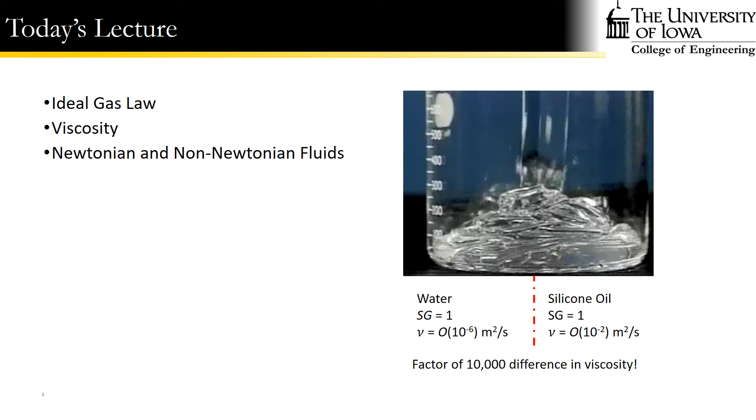Another way to refer to viscosity is as a notion of fluid stickiness. As a sub-bullet under viscosity, we'll discuss the 2 main classes of fluids: Newtonian and non-Newtonian. Let's go ahead and move to the notebook.

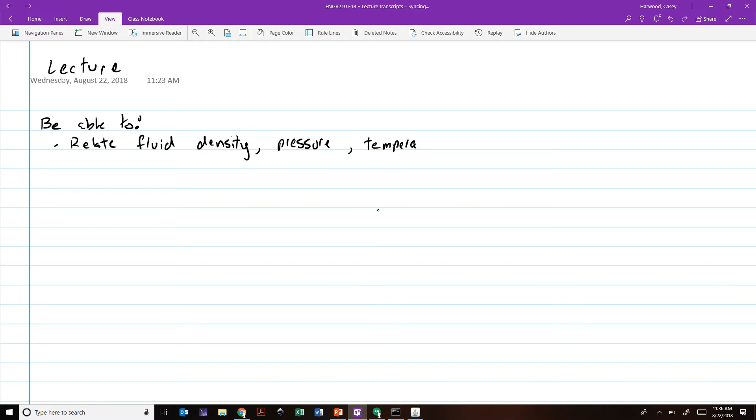So the questions we want to answer, or the goal by the end of the lecture: we want to be able to relate fluid density, which we discussed last time, pressure, and temperature using the ideal gas law.

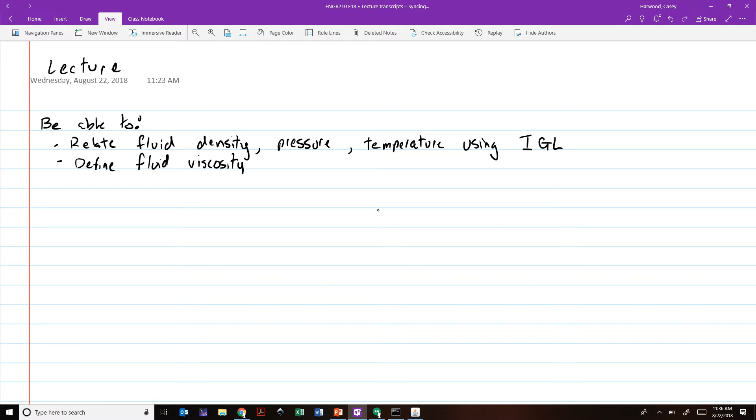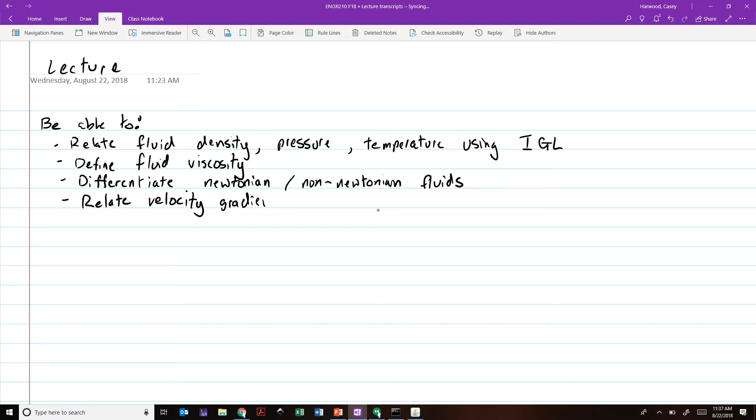We want to define fluid viscosity, differentiate Newtonian and non-Newtonian fluids. And then finally, where the numbers actually come in, we want to be able to relate velocity gradients in a fluid to shear stress. It's the definition of fluid viscosity and this idea of a Newtonian fluid that will allow us to do that.

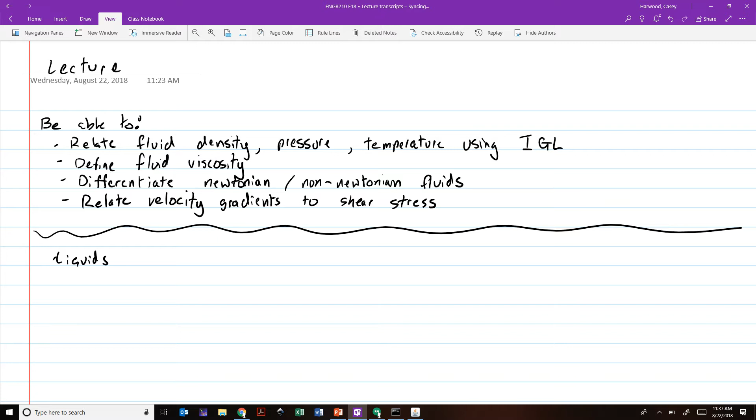Recall that fluids encompass two classes: gases and liquids. And they differ based on what property? Why are liquids and gases different? Compressibility, right? Gases you can squish, liquids you can't. So liquids are what we call incompressible, and gases are highly compressible.

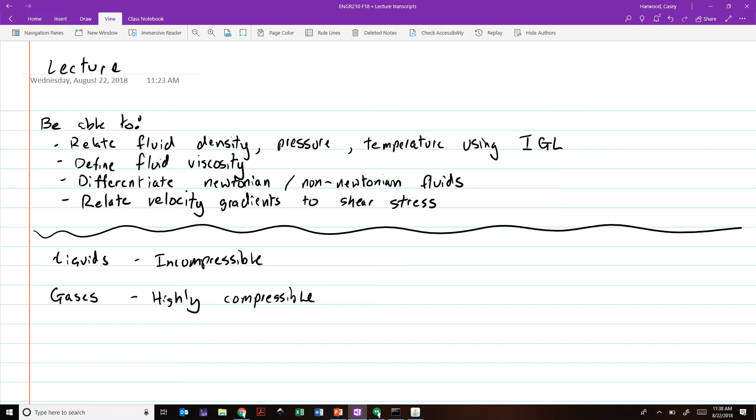This creates a problem for us as scientists, because if we're working with liquids, it's incompressible, the volume doesn't change. It's easy — if we know the volume at one time, we know it at another time, it's going to be the same. But with gases, because they're highly compressible, they're sort of a springy medium, we need some theory to describe how that volume changes, or how they compress under the influence of pressures and temperatures. And that's where the ideal gas law comes in.

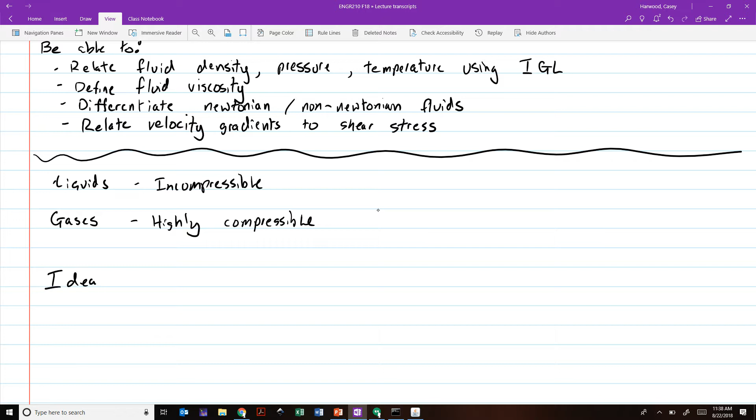This should be familiar to you from thermo and/or chemistry. The ideal gas law is written in several ways. In this course, we'll use this expression: the density is equal to the pressure over the gas constant times the temperature. Or, the pressure is equal to the density times the gas constant times temperature.

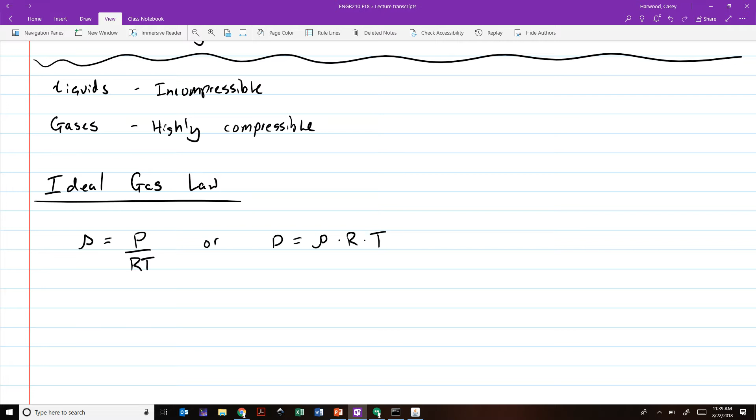In these expressions, rho is defined as density and has dimensions of mass, length to the -3 — think about typical units, kilograms per meter cubed. T is the temperature, which needs to be an absolute temperature, meaning Kelvin or Rankine. This has dimensions of theta, which stands for temperature.

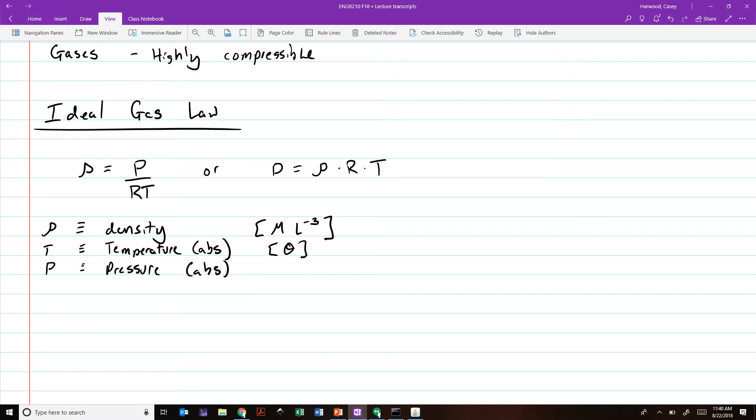P is pressure. Again, this needs to be absolute, meaning measured with respect to zero, a complete vacuum, as opposed to measured with respect to the air around us. Use a tire pressure gauge to measure the air pressure in your tires — it reads 40 psi. The absolute pressure in that case is going to be 40 psi plus the 14.7 psi that is atmospheric, because it's a balance between the two pressures — it's giving you the difference. So for the ideal gas law, we need to make sure that we are adding in whatever the ambient pressure is if we're using a pressure gauge. We'll talk more about this in the next chapter.

And R is, of course, the gas constant. This pressure has dimensions of mass, length to the -1, time to the -2. And if we went ahead and did the dimensional analysis we did in the last lecture, we'd find that R has dimensions of length squared, time to the -2, temperature to the -1.

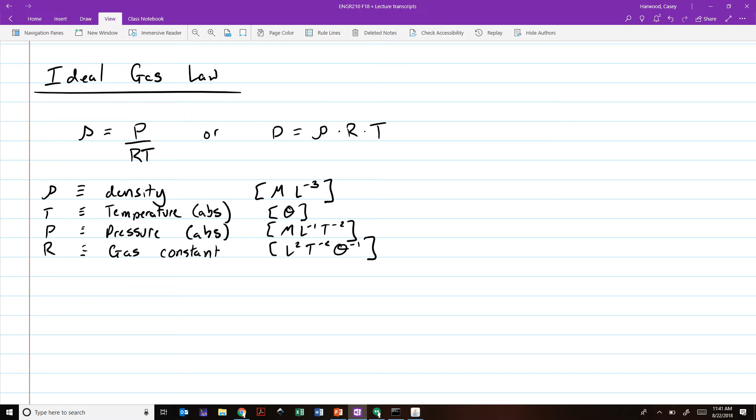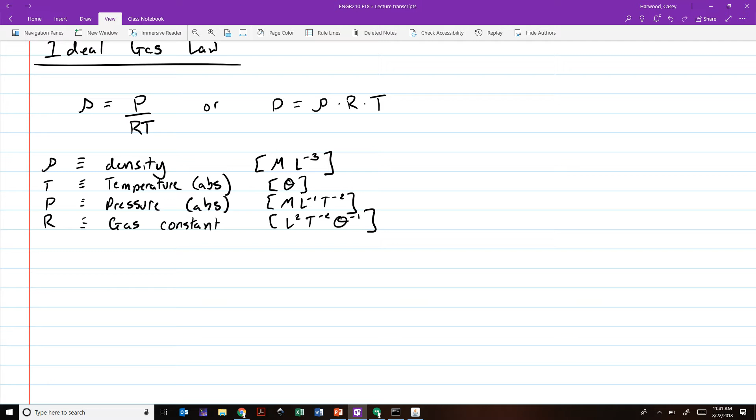So the ideal gas law is all over engineering. We use it a lot in aerospace and chemical engineering, thermodynamic processes, etc. You probably have a fairly intuitive understanding of how it works. For example, if we hold the temperature constant, that says the pressure and the density are going to be proportional to one another. So for constant temperature, rho, which equals mass over volume, is going to be proportional to the pressure.

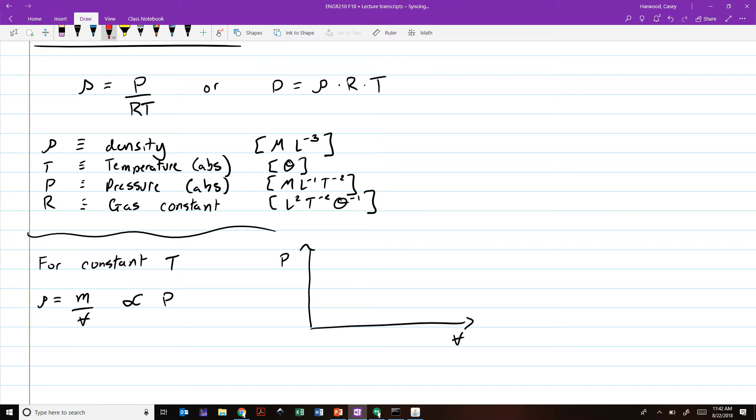This is something we know as Boyle's law. In other words, it's saying that if we were to plot the volume of a gas against the pressure of a gas, they would have an inverse relationship, if it was at constant temperature. And as I said, this is known as Boyle's law.

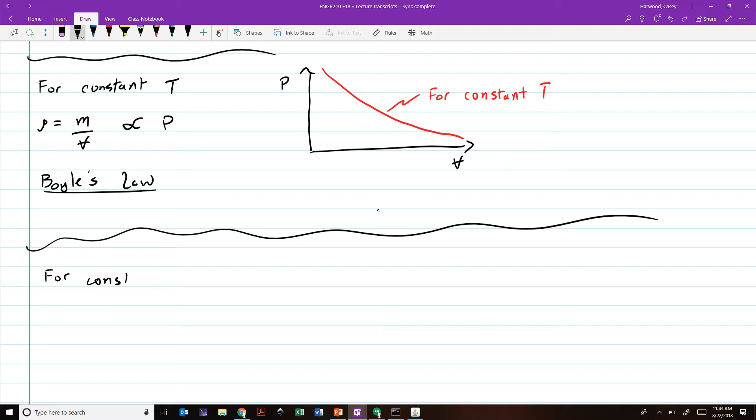On the other hand, if we hold the pressure constant and plot the temperature against the volume of a group of gas molecules, we would find that they vary linearly to one another. So this says that T is equal to P over rho R, which equals P V over R M, where M is mass, V is volume, R is constant, and because of conservation of mass, the mass is constant. So this says that the temperature and the volume have to be proportional to one another. And this one we call Charles' law.

So these are just two variations on the ideal gas law that you've probably encountered before. It's been a long time since I've taken chemistry, so I don't remember what's in the curriculum, but these are based on the more generalized ideal gas law. So let's do a quick example.

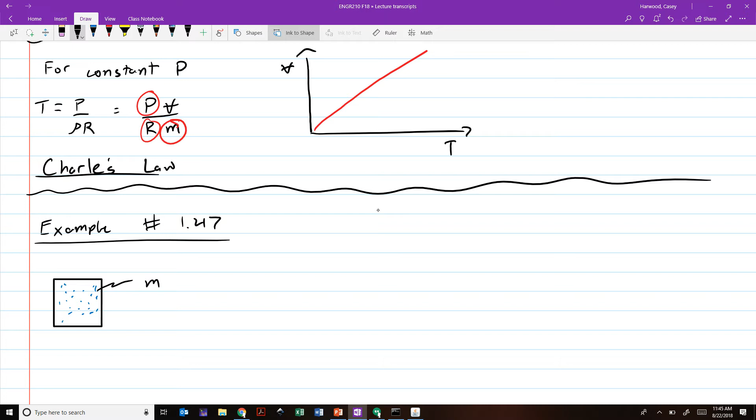So this is problem 1.47 from the book. The idea is we've got a closed tank, okay, and this tank is full of an unknown gas. However, we know that the mass of the contents of the tank is equal to 0.3 pounds mass. We know that the volume of the tank is 2 cubic feet, and we've got a pressure gauge on the side here that's reading 12 psi.

So the question now: somebody says, all right, here's this information about this tank and the gas inside of it. Is the gas oxygen or is it helium? Find: oxygen or helium.

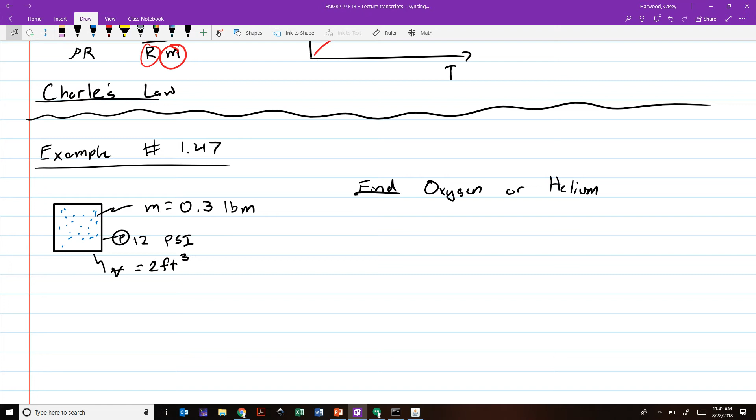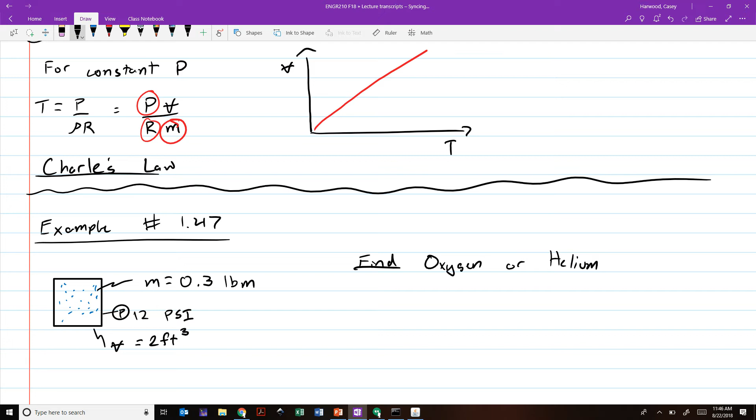So we've got all the information we really need here, right? We know the pressure, we know the mass, and we know the volume. And we have a temperature probe - that's what I'm missing here. We've also got a temperature probe that says the temperature is 80 degrees Fahrenheit. So we've got T equal to P times volume over R times mass. We know the temperature, we know the volume, we know the mass, we know the pressure. So because we know all those things, it's easy to find R.

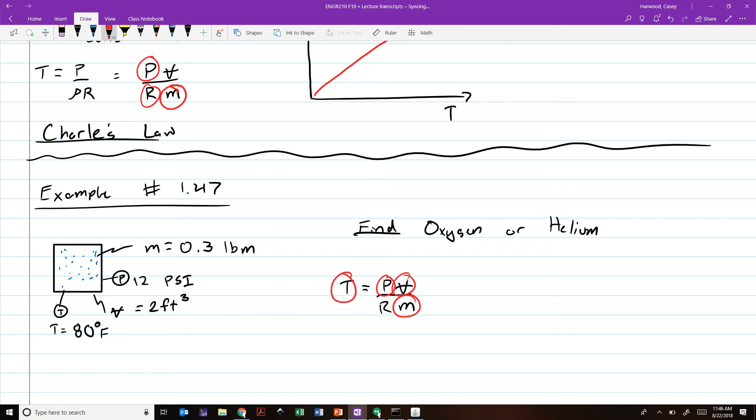And R is different for helium than it is for oxygen, so that should be our clue. The real trip-up here is that we need to remember that we're using absolute units, right? Degrees Fahrenheit, not absolute. The reading from this pressure gauge at 12 psi is not with respect to 0, it's with respect to atmosphere. So we need to go through and translate all of our measurements into absolute units, plug them in, find R. So go ahead and see if you guys can get a head start on the absolute temperature and absolute pressure. Solving for R is going to be then...

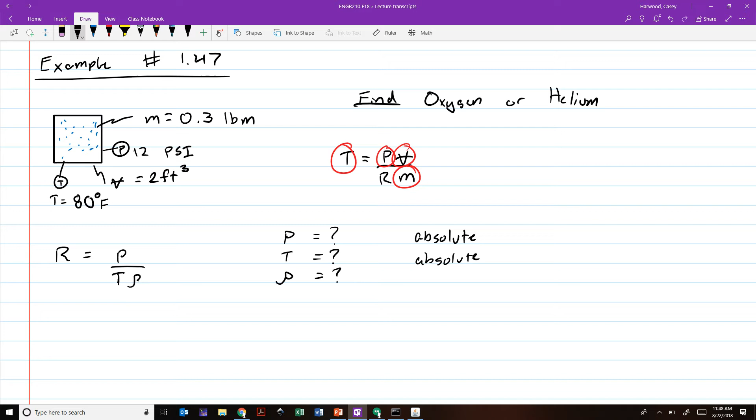What do we got for an absolute pressure? Anyone want to volunteer? Well, what's atmospheric pressure? What's 1 atmosphere? 14.7, okay. So if that pressure is saying the pressure in the tank is 12 psi greater than that, then just add the two. So we're talking about 26.7 psi.

Which we'll see in a second, right, that everything else we have is in feet. We have feet for the volume, we've got our temperature in Rankine, and so it works out better if we put this into pounds per square foot, which means multiplying it by 144. So if we just multiply that by 144, we end up with 3844.8 pounds force per square foot. So it's a -2, okay.

Temperature - I know for me it's been a while since I've done absolute units or absolute temperature units from Fahrenheit. Who remembers the translation from Rankine to Fahrenheit? Kelvin's 273, Rankine is 460. So in this case, if 0 Fahrenheit is 460 degrees Rankine, degrees Fahrenheit plus 460 degrees gives us 540 degrees Rankine.

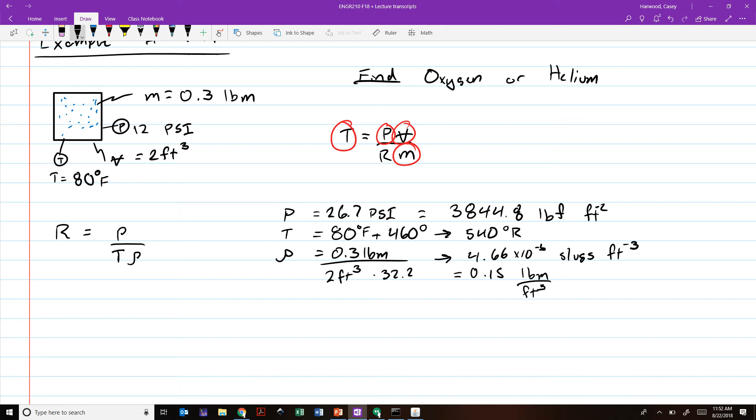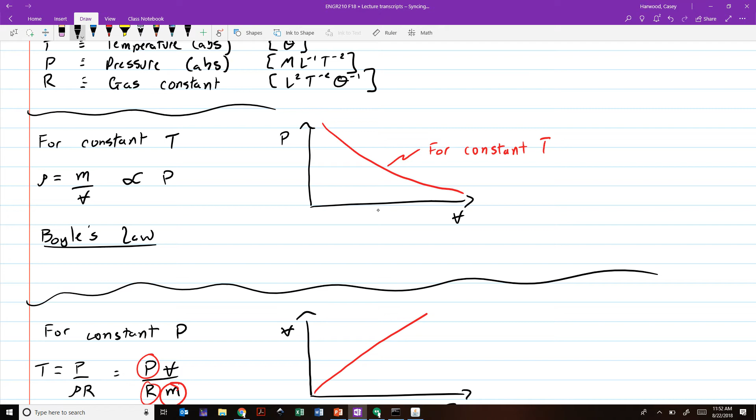Because those tables in the back of your book generally don't give you densities other than at atmospheric pressure. It is pressurized, it's been compressed, the density increases. That's one of the things we said up here, that pressure and volume are inversely proportional, so pressure and density are proportional.

So that is one of the reasons we need to go through this process of finding R, because R is a constant. R doesn't depend on temperature, it doesn't depend on density, it doesn't depend on the pressure.

So if we go ahead and plug these all in, R is equal to 3844.8 pounds force per foot squared, divided by 540 degrees Rankine times 4.66 times 10 to the -3rd slugs per foot cubed. What we'll get is a value of 1,528 foot-pounds force per slug degrees Rankine.

Now, if we were to go to the back of our book, or the front, depending on which book you've got, and look up the gas constants for helium and oxygen, what we would find is...

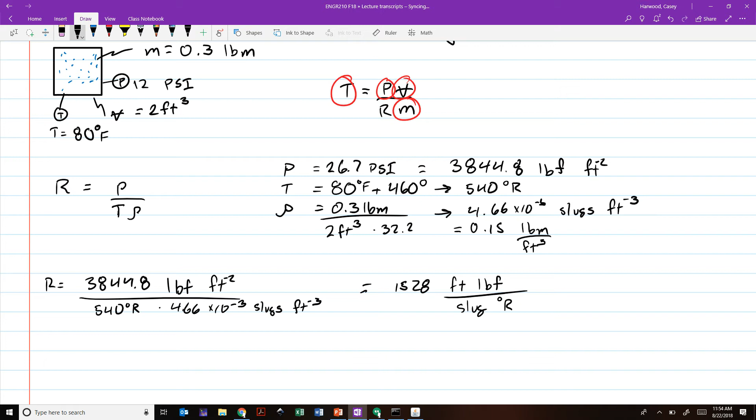Helium R is equal to about 12,420 pounds force feet per slug Rankine, and oxygen R is equal to about 1554, same units. So clearly, if we compare these, it's obviously not good - we're off by a whole order of magnitude for helium. So we could say with reasonable accuracy that this is probably close to pure oxygen in the tank.

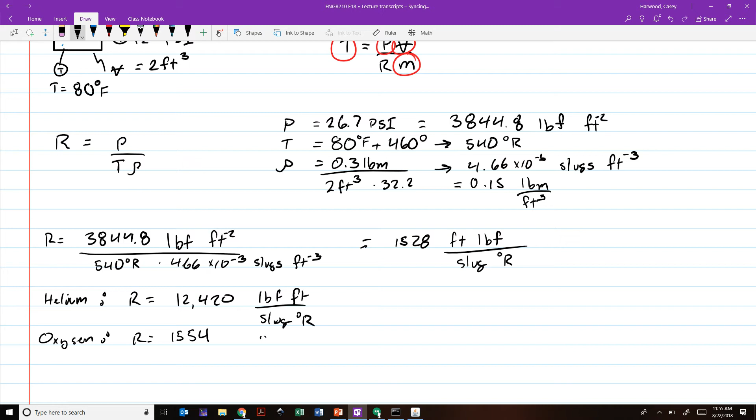Why did we get rid of the volume? Well, we didn't get rid of it, we just divided it. Instead of plugging in the volume right here, we took the volume and the mass and turned it into density and put it in there. So we could do it either way.

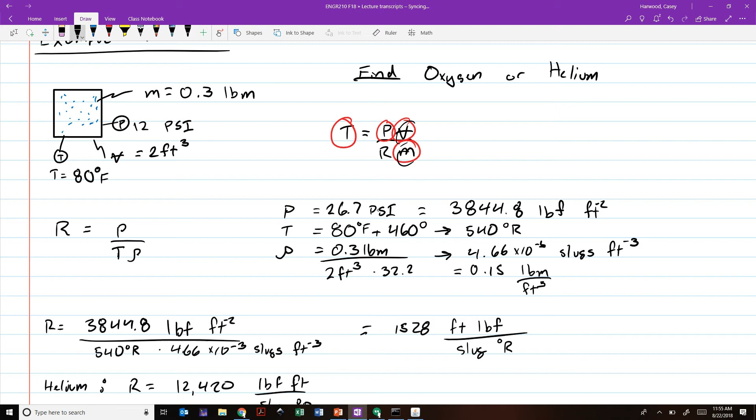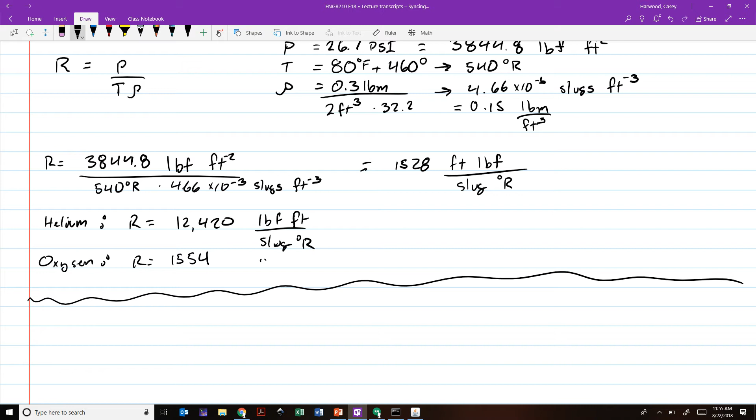All right, so I'd love to keep talking about ideal gas, but our time together is short. So we're going to jump onto the topic of viscosity.

I'll give you guys a few more seconds to finish copying if you need. So like I said before, viscosity is this notion of fluid stickiness. It's what dictates the numbers on the motor oil you put in your car. It's what dictates the reason molasses is harder to pour than rubbing alcohol. And it's one of the things that dictates how hard it is to pump things through pipes or to pump blood through blood vessels.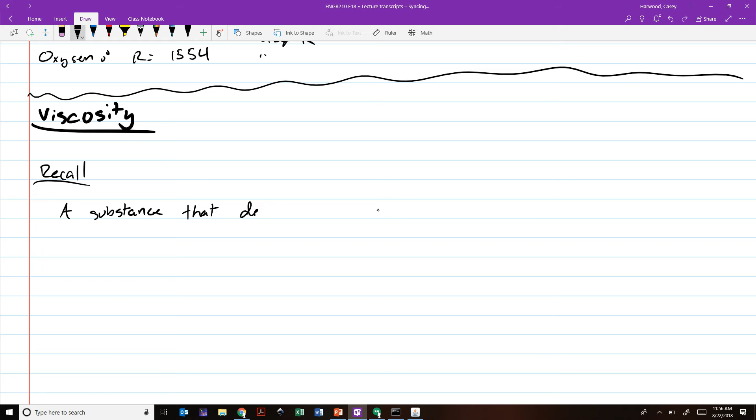So quickly, I want you to recall our definition of a fluid - not gas versus liquid, but just any fluid. And that was a substance that deforms continuously under an applied shearing stress.

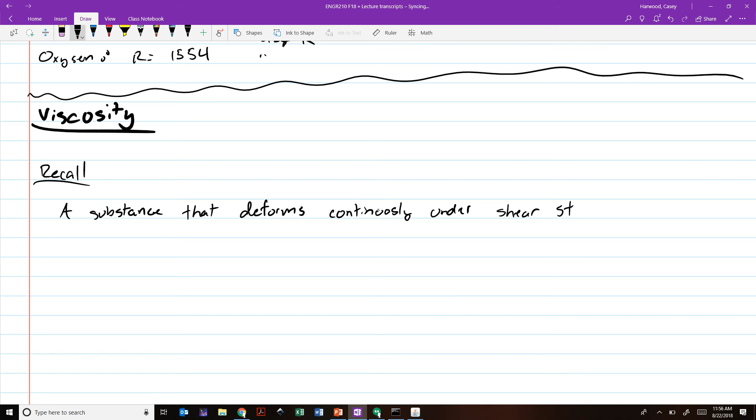So I want to formalize this really quickly, because probably from previous classes, if you've taken def bods or continuum mechanics, you've seen the idea of shear stress and deformation. But it pays in this class to make sure we're all on the same page. So I want you to consider a small little area - this little blob here is a small area we'll call delta A.

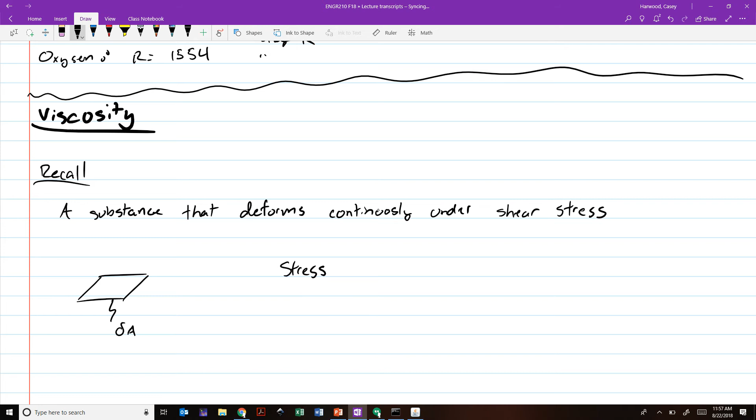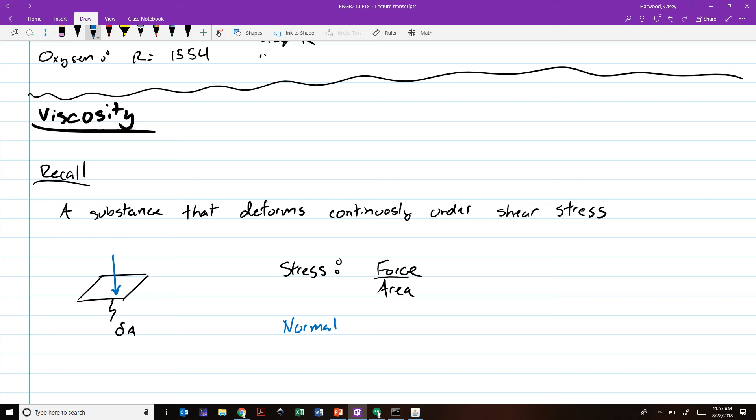Now the definition of stress is force divided by an area. If we apply a small little force directly downward on this area, this is what we would call a normal stress, because it is being applied in the same direction as the normal to this surface - it's perpendicular. A normal stress is something we more frequently refer to as pressure.

However, if we have a small force that is being applied tangential to this surface, in a direction that would cause friction as opposed to just pushing or pulling, then this is what we would refer to as a shearing stress.

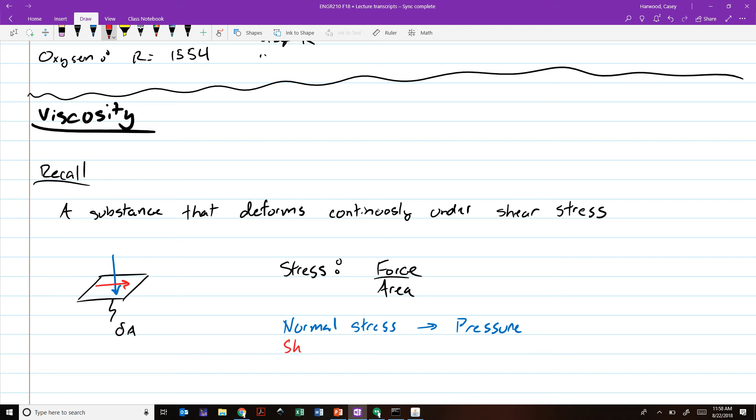So the idea here is, as I said before, I want you to visualize - if we were to take a solid object, this is a very poor demonstrator, but if we apply a shearing force to it, if I push with one hand and pull with the other, there's a force being applied over a surface area, creating a shearing stress. Notice if I apply a static force, the eraser deforms a little bit - it takes on an angular deformation.

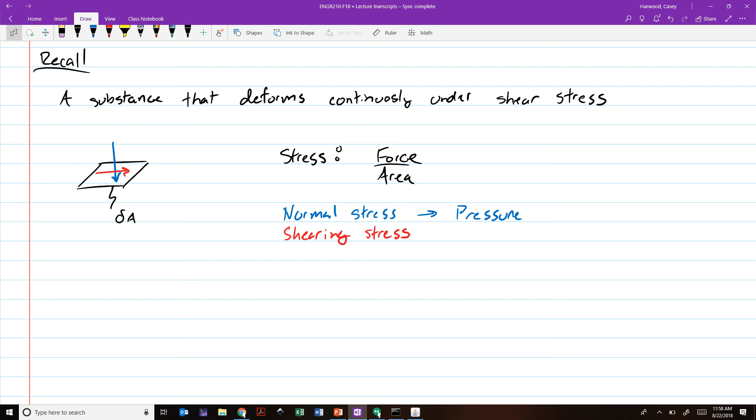So that's a hallmark of a solid - with solids, if you take an object and apply a shearing stress to it, which we'll refer to as tau, the symbol for shearing stress, equal to F over the surface area being applied, then that object will deform into this sort of parallelogram. And this angle of deformation is what we would call beta, or the shearing strain.

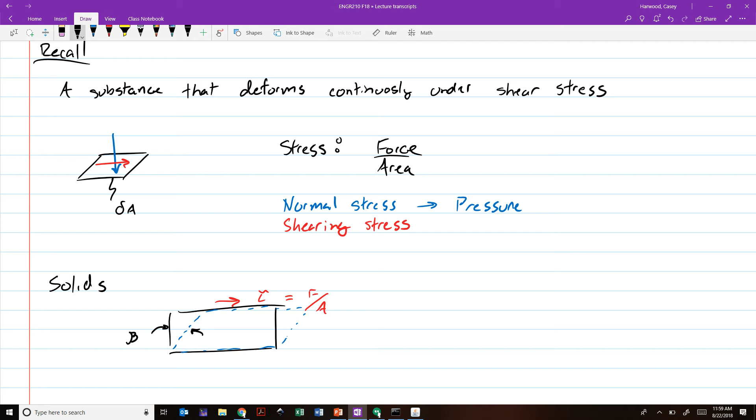So with solids, the classic law, Hooke's law, says that shearing stress is proportional to shearing strain. That is, if I double the force being applied to the same area, then the shearing stress will also double, and so will this deformation. Classic continuum mechanics for solids. Fluids, it's a different story.

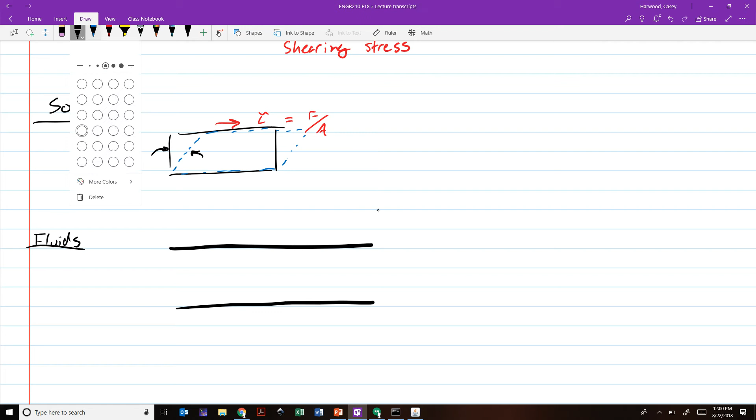Fluids: let's say I've got two parallel plates. The plate on the bottom is glued down to the floor, and the plate on top is free to move. Between these plates, I have a fluid.

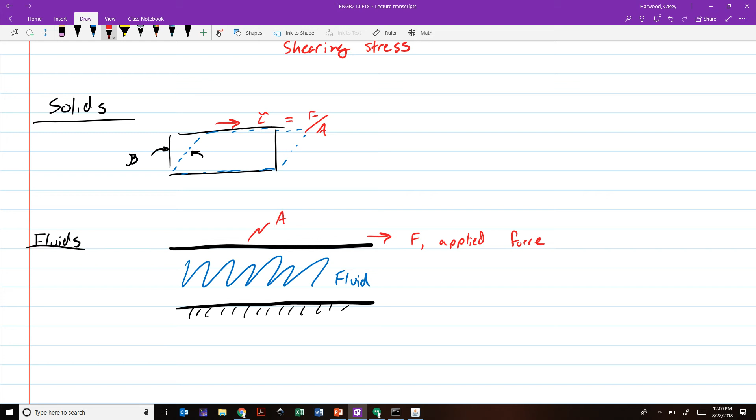Now, if I apply a force to this plate, F, which is our applied force, and the top area, the plate has an area of A, then I'm creating a shear stress between the plate and the fluid of tau, which is equal to F over A.

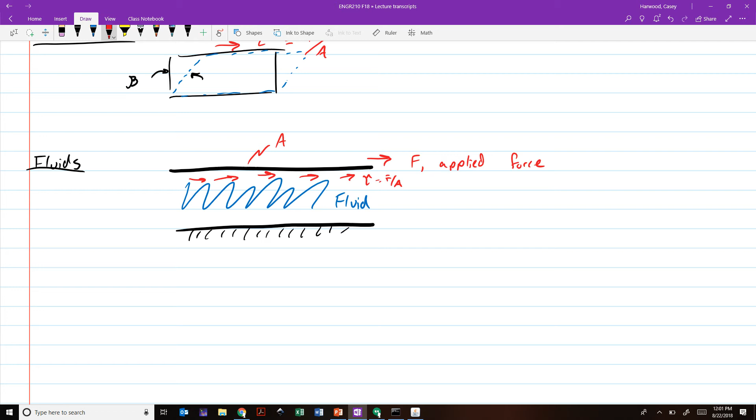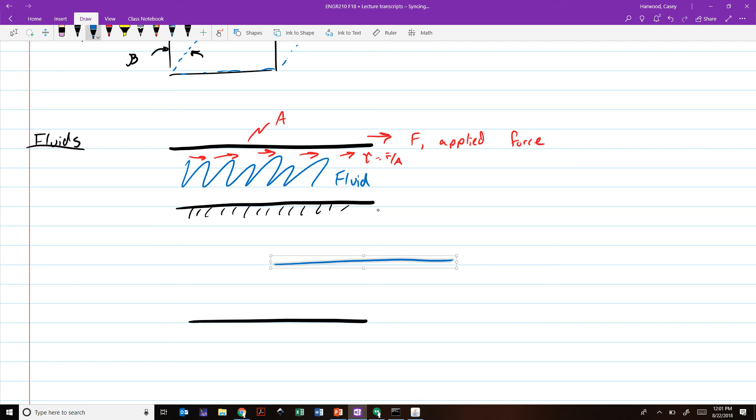Unlike the solid, though, this isn't simply going to deform a little bit and then stop at a static equilibrium. With a fluid, the top plate is going to begin sliding continuously at some constant velocity.

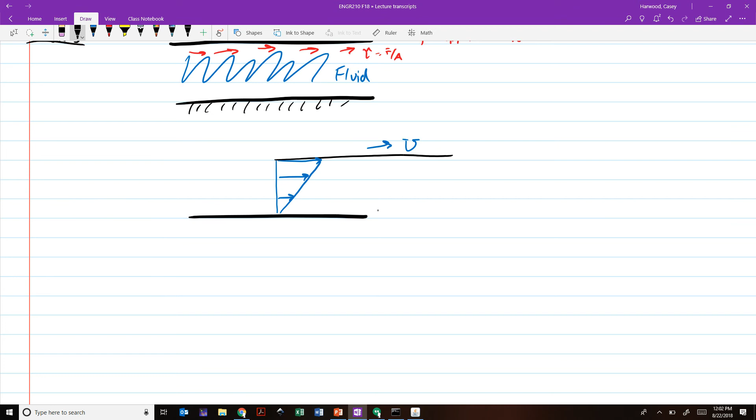So that constant velocity of the top plate is going to create a velocity gradient in the liquid. The fluid is going to stick to the bottom plate, having zero velocity. At the top plate, it's going to match the velocity of that top plate, which we'll call U. If we set up a coordinate system and say that we measure y upward from the bottom plate, then the velocity of the fluid itself would be a function of y, which would be the velocity of the top plate times y divided by b, where b is the distance between the plates. So it's just a linear variation from 0 up to u.

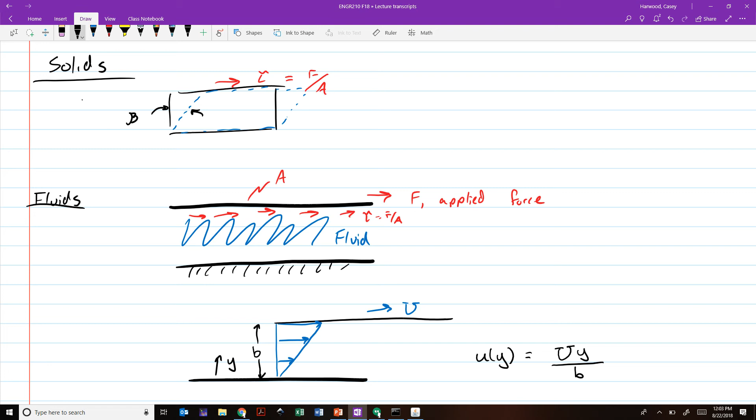At the same time, because it's deforming continuously, if we recall how we defined the shearing strain as beta, we don't have a single value of beta. What's happening is that beta starts at 0 and it grows continuously. And because the top plate is moving at a constant rate, beta is increasing at a constant rate.

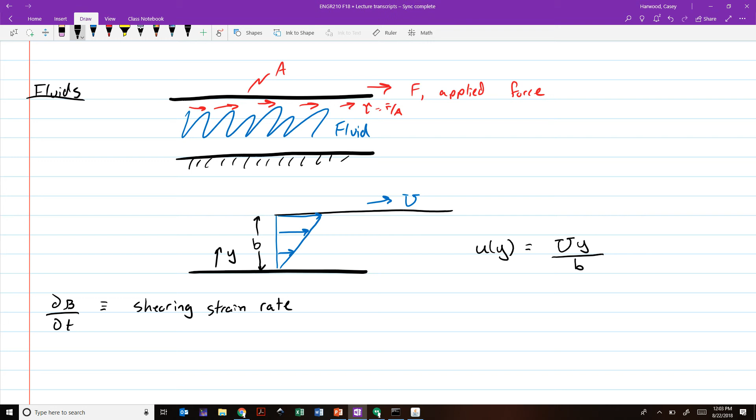So rather than having beta, we're going to define d beta dt as the shearing strain rate. Unlike a solid, a fluid, instead of being governed by Hooke's law, has this law that says the shearing strain rate is proportional to the shear stress. So as with a solid, doubling the force that's creating the shear will double the strain deformation. In this case, doubling the force will double the velocity with which the top plate slides, and will double the rate at which that angular deformation in the fluid increases.

A couple more things here: we can write that d beta dt is equal to, skipping some derivations, the velocity gradient in the fluid. So if we look at the velocity of the fluid u(y), and take the derivative with respect to y, we get u over b. So we could say that del beta del t, the partial derivative of the strain rate with respect to time, is equal to u over b in this particular case.

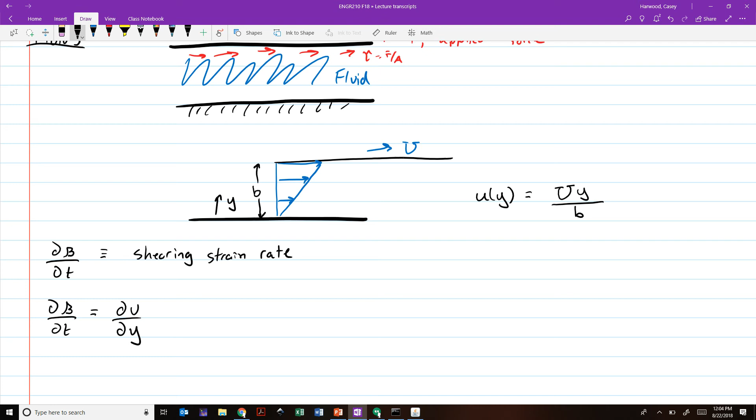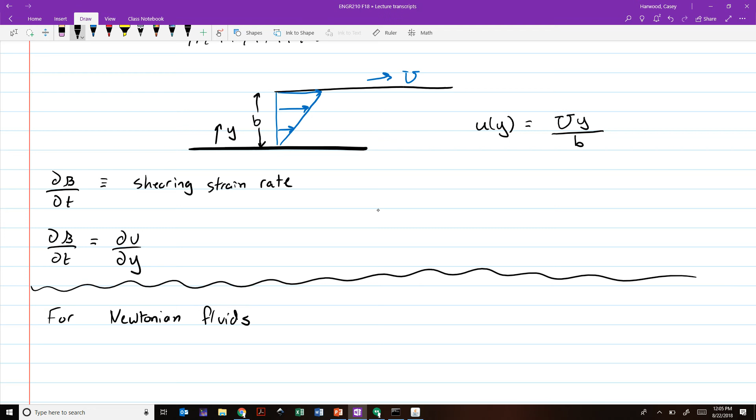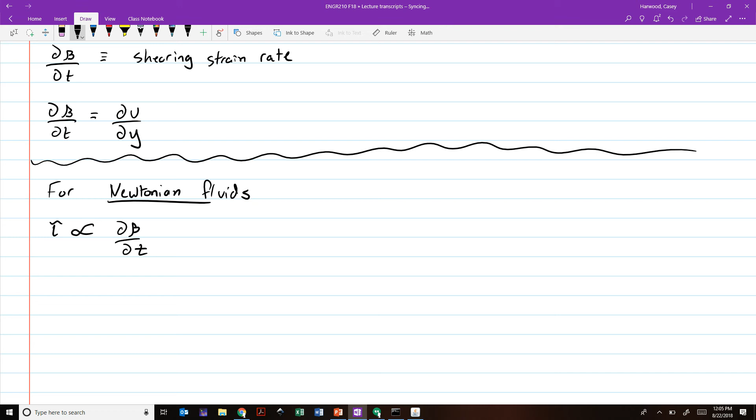Now here's where this idea of viscosity and Newtonian fluids comes in. For fluids that we call Newtonian, we know that the shear stress is proportional to the shearing strain rate. Stress proportional to strain rate. And because of this definition, we can say the shear stress is proportional to the velocity gradient in a fluid.

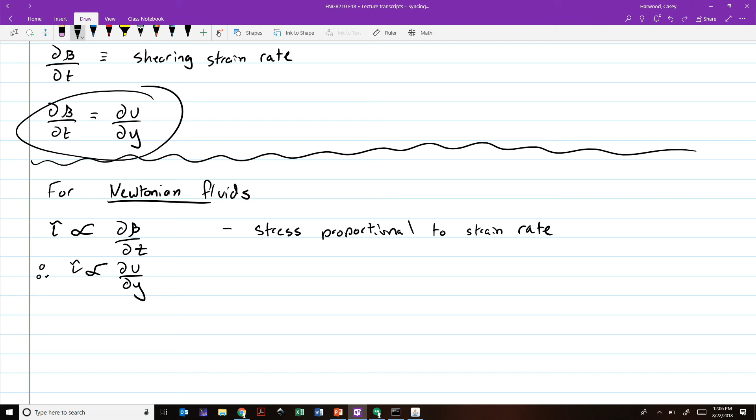By going out and doing a bunch of experiments on different types of fluids, the scientific community has determined that there's a constant of proportionality particular to a fluid, which we call the viscosity. So we found that tau is equal to the variable mu times du/dy, where mu is what we refer to as the viscosity of the fluid.

To recap, a Newtonian fluid is one for which this is true: the velocity gradient is proportional to the shearing stress. In a second I'll talk about non-Newtonian fluids where that is not true. Non-Newtonian fluids aren't covered in this class, but I want you to know what they are—they're a lot more complicated to deal with. This is going to be our bread and butter for the class, and this is one of the main things—if you remember nothing else from this class, remember this equation. This is the fundamental governing or constitutive law for the way fluids move under stresses.

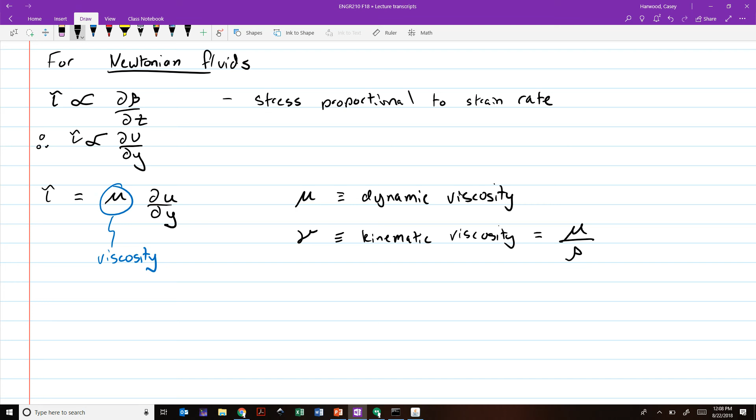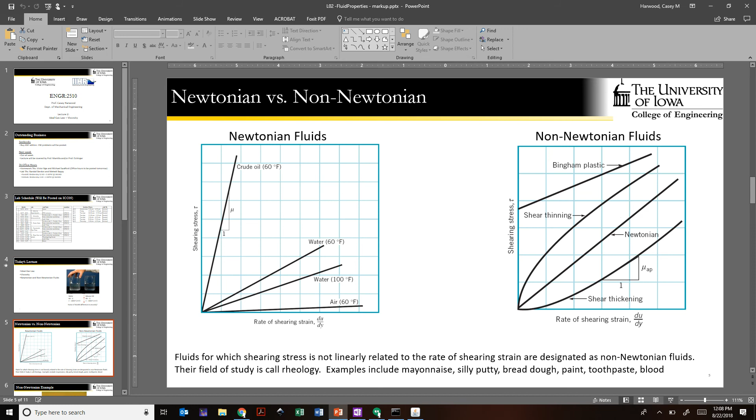All right, so as I said, this holds for most, actually for all Newtonian fluids. And Newtonian fluids, luckily for us, make up most fluids that we're going to deal with. So Newtonian fluids are these ones where we have the rate of shearing strain and we have the shearing stress, and there's a linear relationship between them. But that constant, that viscosity, changes depending on what fluid we're talking about.

So for example, air is not very viscous. That's why if you're waving your hand through the air, you don't feel this big frictional pull that's resisting your motion. Whereas if you were trying to wave your hand through a tank of crude oil, there would be a lot more resistance to your motion as a result of that viscosity.

Non-Newtonian fluids, on the other hand, are the ones where we don't have this nice proportionality between shearing strain and shearing stress. There are three types of non-Newtonian fluids. There are what we call shear thickening fluids, which, as the name implies, means that as you shear it, as the rate of shearing strain increases—if you have those plates sliding past one another and you start to slide it faster and faster—the resistance to that motion increases drastically. In other words, it gets harder to shear the faster you shear.

Shear thinning fluids, on the other hand, get easier to shear as you shear them. And then Bingham plastics are ones that behave like a solid up to a certain shearing stress. There's no shearing strain rate. They'll stay in static equilibrium until you hit some threshold, and then they'll begin to act like a fluid.

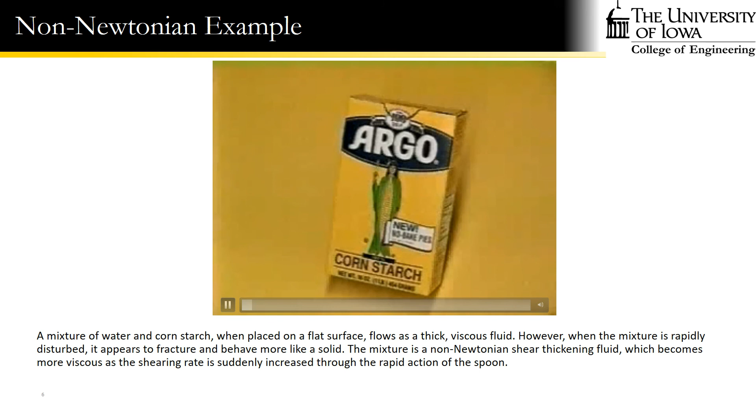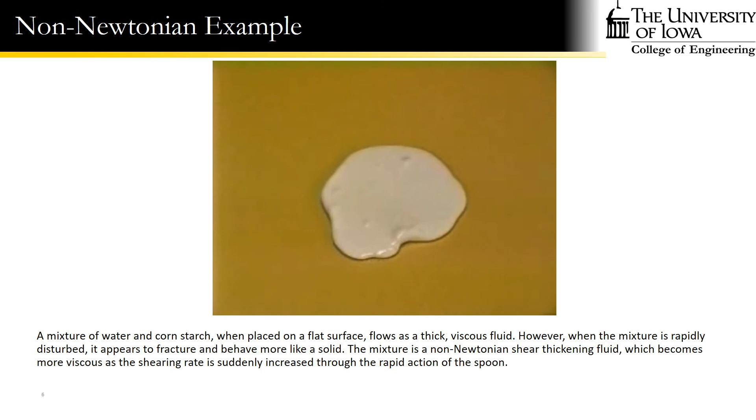So examples of a shear thickening fluid would be something like a mixture of cornstarch and water, where it may behave as a fluid when it's not being sheared very quickly. If you take a mixture of cornstarch and water and put it on a table, it'll spread out in a very fluidic manner. But if you try to subject it to really rapid shearing strains, like pushing it around with a spoon, it starts to thicken up.

A shear thinning fluid would be something like house paint, where as you brush on paint, the idea is it should spread smoothly and easily as you brush it, but then once you stop brushing it, you're no longer shearing it, and you want it to stay put more or less. You want it to get proportionally harder to move as you reduce the rate of shearing. So if you think about house paint, it's actually harder to push the brush, or seems harder, at slow speeds than if you brush faster.

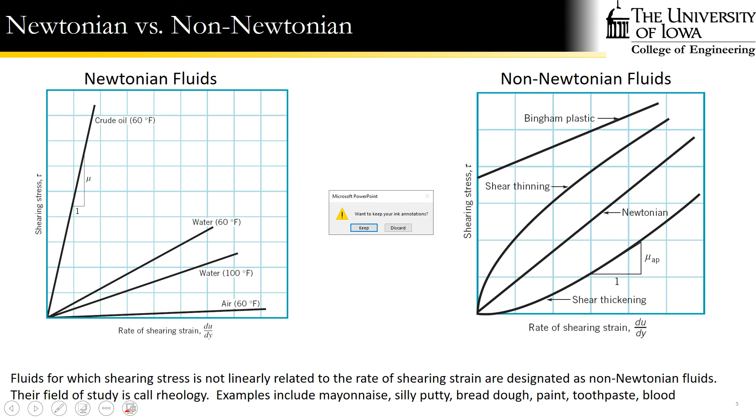And something like a Bingham plastic, an example would be toothpaste or mayonnaise—something that can be kind of gelatinous, but behaves like a solid until you push or pull on it or shear it to a certain threshold, and then it'll start to behave in a fluidic manner. I have more examples of these that we'll come back to if we have time, but for the moment I want to make sure we hit on an example of how we would actually calculate the shear stress in a fluid.

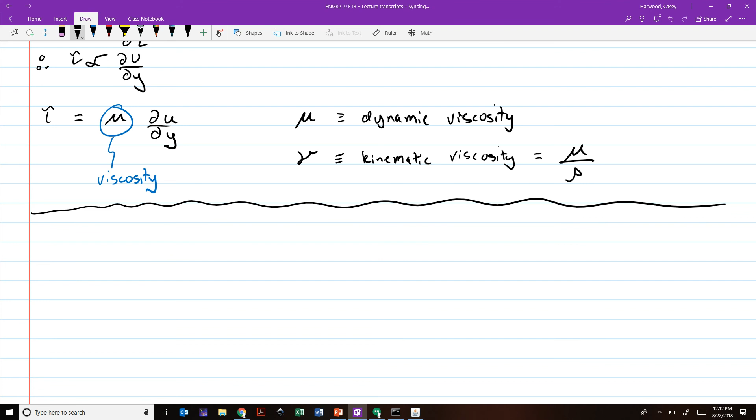Okay, so this is example 1.5 from the book. The idea here is we would have two plates. In this case, both of these plates are fixed, and then between these plates we will have a fluid.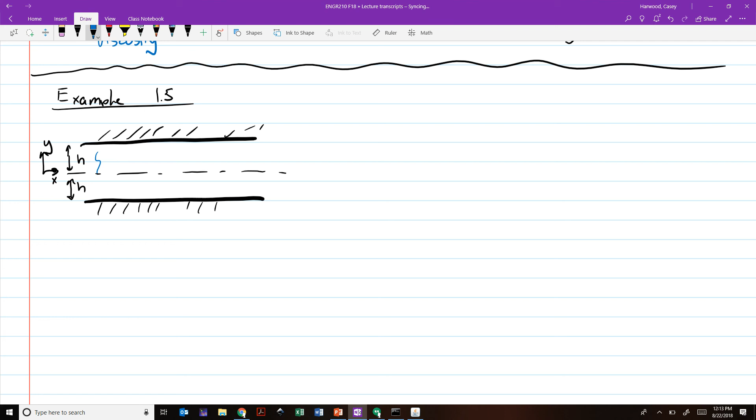Now these plates are arranged with a distance between them of 2h, that is, from the center line between these plates to either of the walls would be a distance of h. And we're going to go ahead and put our coordinate system right here on the center line—here's x, here's y. Now we'll show this later how we actually get to this result; this is not till chapter 7, I think. If we were to push fluid through this pipe, we're going to get a velocity distribution that looks like this—it's going to be parabolic in shape.

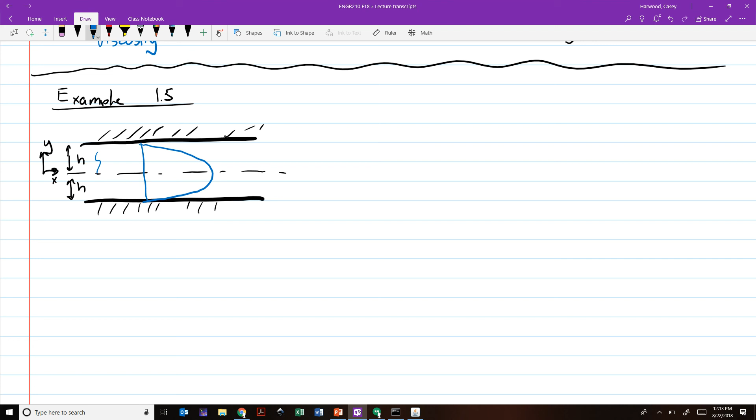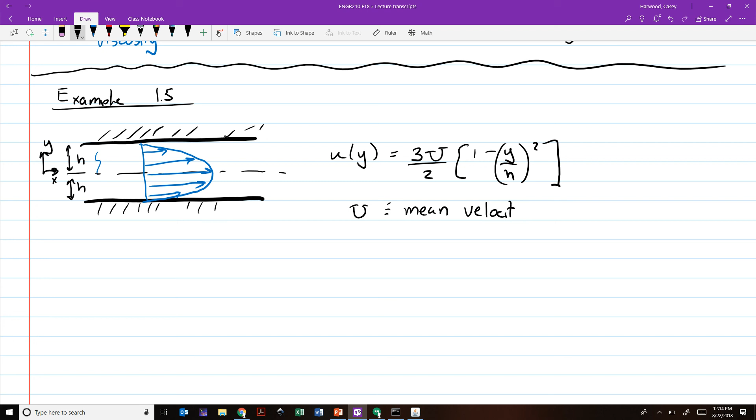So here's the velocity of the fluid flowing between these two plates, and it has a functional relationship that looks like this: u of y is equal to 3U divided by 2 times 1 minus y over h squared, where u is, we don't know what this is in terms of numbers, but this is defined as the mean velocity through the pipe.

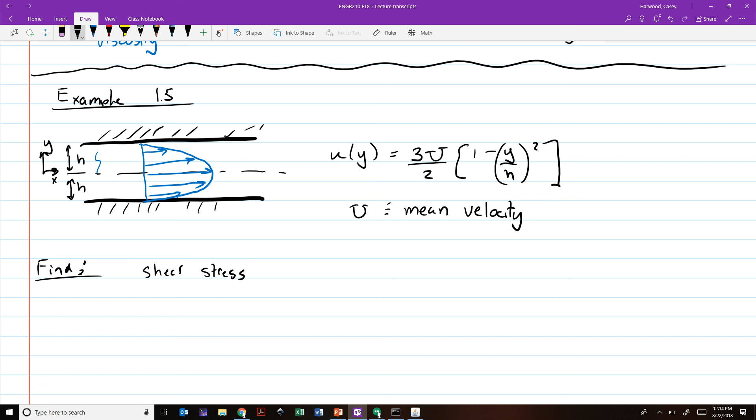So the question is, can we find the shear stress tau at 2 points: on the bottom wall, and at the center line between the two plates. And that should be an A there.

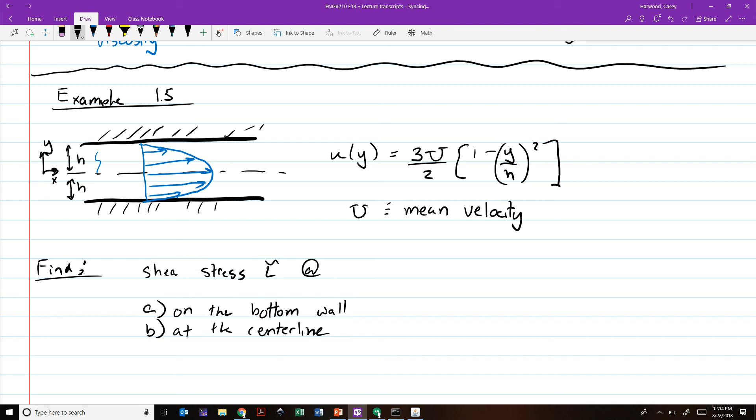All right, so we've got our definition of how to find shear stress. We're not going to worry about the numbers here in terms of what the viscosity is and what that big U is. We want to just find this symbolically because we could plug in values later if we look them up in a book.

So for part A here, we would say, okay, we know that tau is equal to viscosity times derivative of u with respect to y, and we would be evaluating this at y equals what for the bottom wall? Negative h, right? Because y is measured from the center line of the pipe, or center line between the two walls.

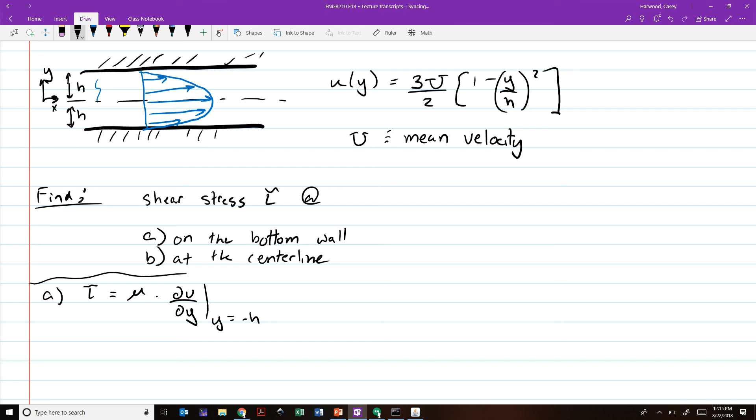So go ahead and calculate the derivative du dy while I write out how we would do this for the part. We're going to need that derivative for the second part as well. So dust off your calculus books.

Okay, who's got a derivative for the velocity? That is an expression for the velocity gradient. Any takers? 3 halves big U times minus 2y over h. I guess you could cancel out the 2's. Right, the 2's would go away. So it would end up being 3 u y over h.

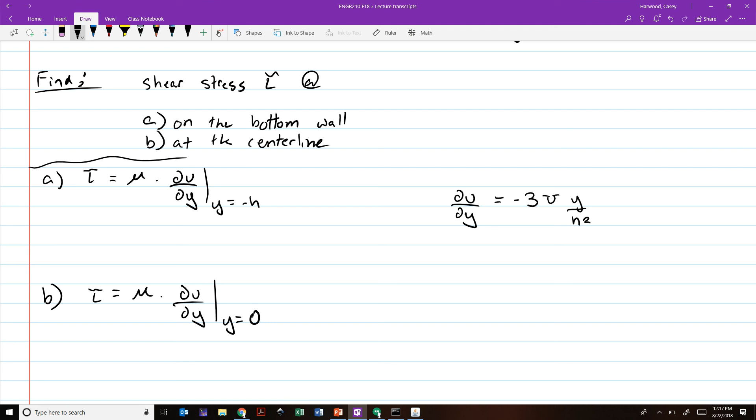The h there would end up being squared, yes? No, it wouldn't. Yes, it would. Okay. And then we'd end up with a negative sign out in front, because of the negative sign here.

All right, so finding the shear stress at those two different locations is just as simple as plugging in y equals negative h and y equals 0 into that expression over there. So at the bottom wall, where y is equal to negative h, we would plug in a negative h here. One of those powers of h would cancel out, and we would end up with tau is equal to mu times 3 u over h.

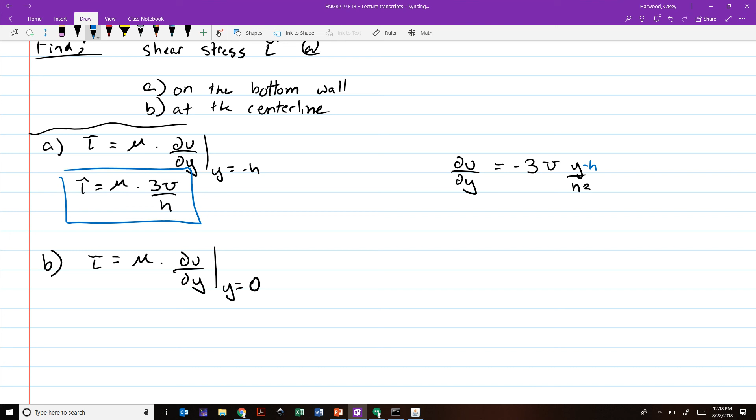For part B, if we plug in 0, it's pretty clear that for y equals 0, the rest of the expression is also going to be 0. Mu times 0, which equals 0.

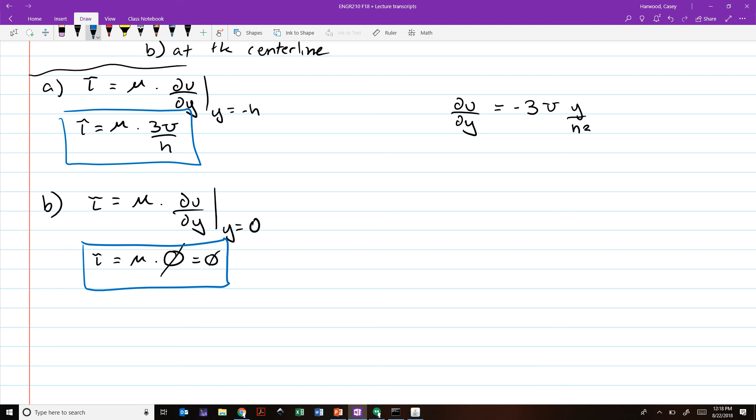So we might ask ourselves, how does that occur? We've sort of implied that fluid motion is associated with shear stress. So if this fluid is flowing, how is it that we get a zero shear stress at the center of the pipe? A nice way to visually look at this is we said that the shear stress is proportional to the derivative of the velocity with respect to y.

So if you come up with a case and you see a velocity gradient that's been plotted out, and you were to draw a line tangent to that velocity gradient at different points, then at the center line of the pipe, that tangent line is straight up and down. This tells us that if we turn our head sideways, it's a zero slope. So because the velocity gradient at this point is zero, so is the shear stress, only along the center plane between the two walls.

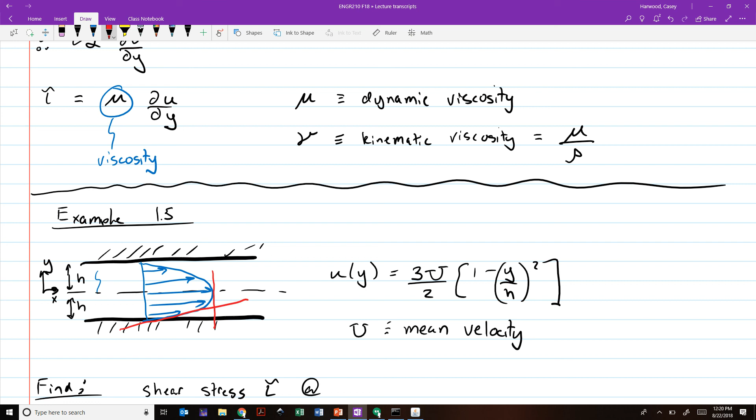Whereas at the bottom wall, if we were to draw a gradient line, it has a very high slope, which suggests that's going to be the point where the shear stress is non-zero. Similarly, where is that gradient highest? For a parabola, the slope is greatest furthest from the origin, so near the walls, the shear stress is the greatest. So some little qualitative tools that you can use to visualize where shear stress is occurring.